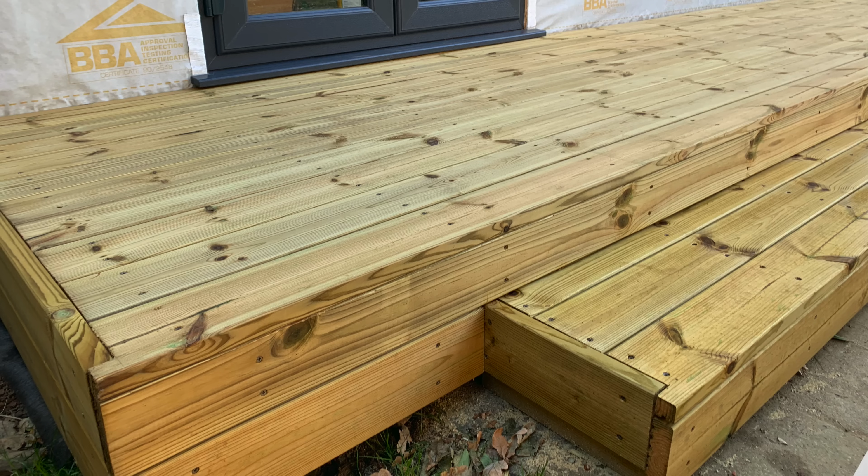Decking is an interesting project unto itself, but in relation to a garden room, having a deck may or may not be necessary depending on your site and how you've built the floor and foundations. The two reasons for having a deck are to hide the gap under a timber floor, though this can be achieved by continuing the cladding down to ground level or thereabouts. The other reason, and the main one for me, is that my door threshold is too much of a step up from ground level, so the deck provides a platform so that the inside and outside are a similar height, and the step up is set further back.

You could just build a step in front of the doors, but with my garden room being on the tall side, I reckon a deck across the whole front helps it look a bit more proportional.

First, we need to rewind back to part 2 and take a look at what rules apply to decking under permitted development, as I didn't specify a deck in my planning application. It's pretty simple. The top just needs to be no more than 300mm from ground level, and I'm assuming the same rule applies as we discussed in this video, that you can take that measurement from the highest ground around the deck so that it can exceed 300mm elsewhere if necessary.

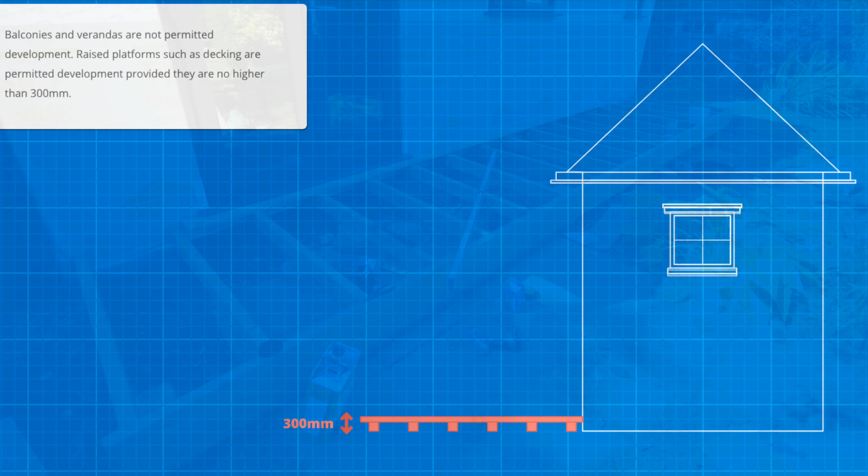So the timber joist that will be holding up the decking will attach to the garden room on one side, but need to be supported on the other. For this I could have used blocks in the same way I did for the floor of my garden room, but instead I opted for fence posts in order to minimise the surface area that could collect standing water, because the deck is exposed to the elements, whereas under the building the blocks will remain dry.

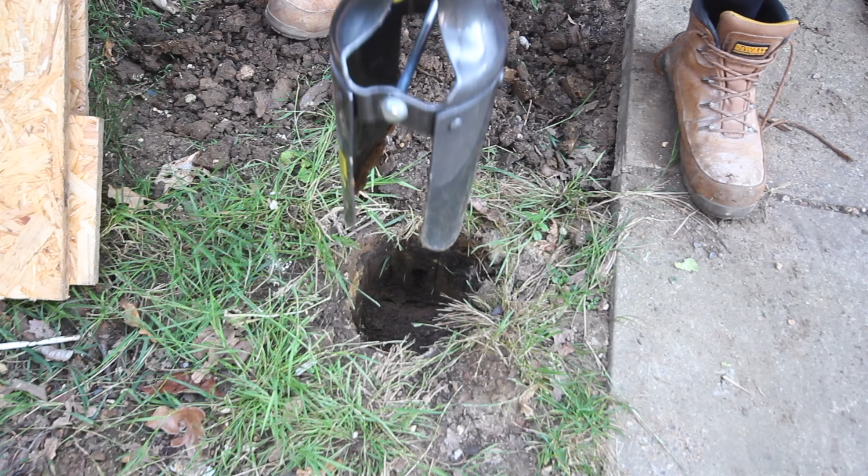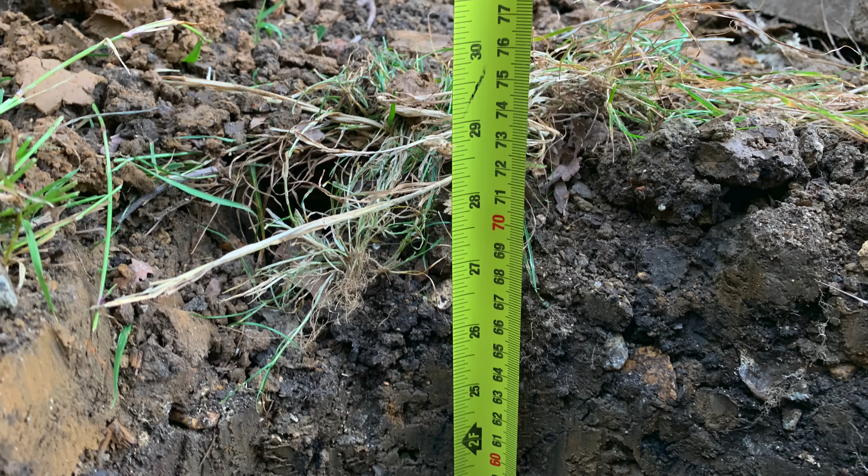I used a post hole digger to dig a vertical hole around 3 times the width of the 4x4 treated posts, so about a foot wide. The posts won't extend that far from the ground, so I don't need to go down too far, but the clay, whilst heavy, is easy to dig, so I managed to get down to around 70cm.

However, because it's clay, I wanted a decent amount of drainage under the post, which I'd saved the last bit of hardcore for, but stones or gravel work just as well and also act to help level the post.

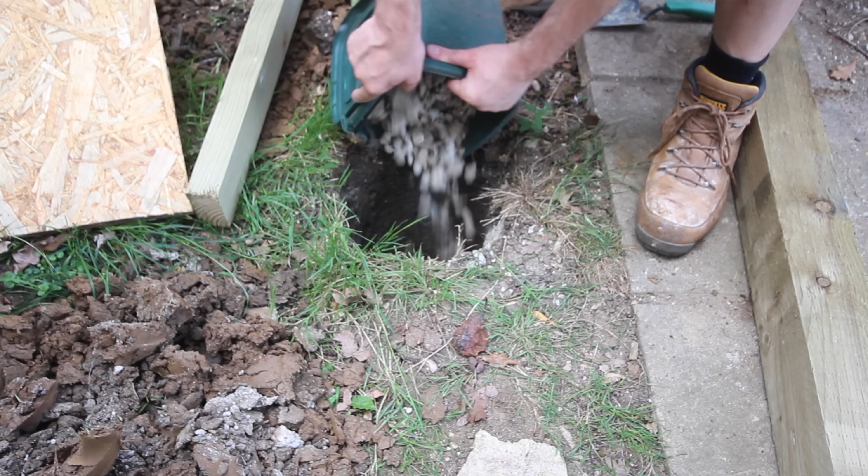Next, I attached the first joist to the garden room. More on this in a minute. I levelled the joist and then clamped it to the post. As the posts are so short, they don't need to be perfectly plumb, just close enough is fine.

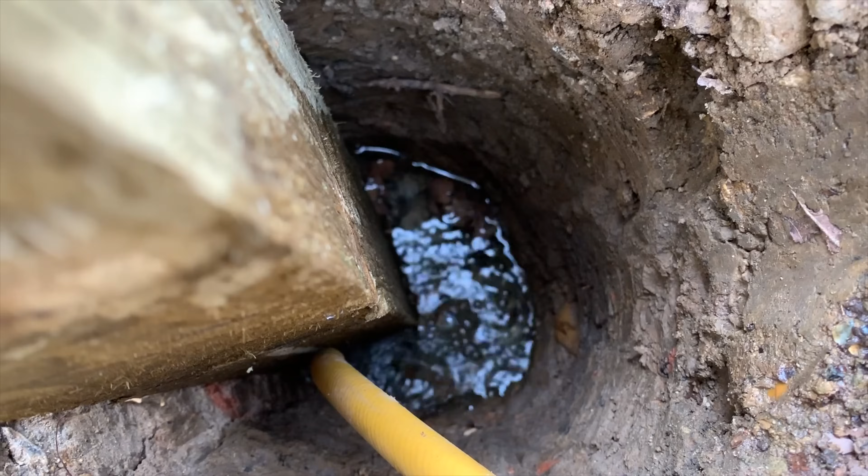I attached the two together with 100mm screws and then half filled the hole with water and poured postcrete in. Postcrete always feels a bit haphazard when you're doing it, but it always comes out nice and strong. I've covered this process in much more detail in this video if you want to check it out.

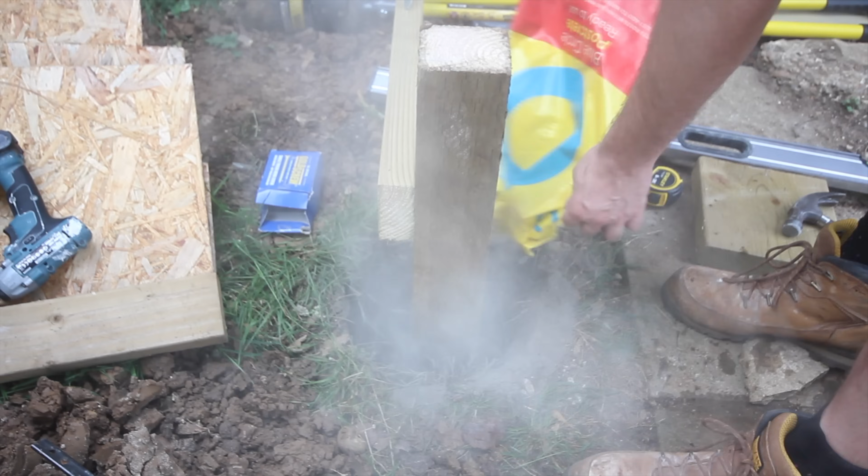One thing I do want to point out here is that if I were doing my foundations again with blocks, instead of just filling the hole around them with hardcore and compressing it, I'd use postcrete like this or possibly concrete. That would have been a lot stronger.

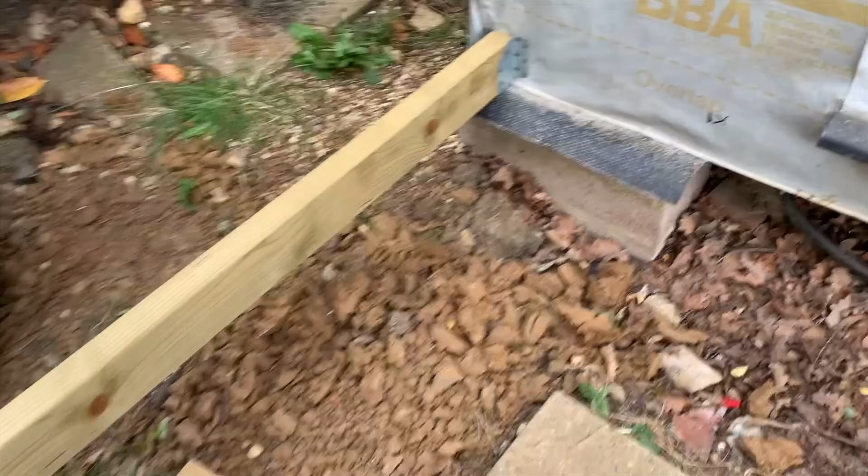So next I could go off the first joist and then mark up each subsequent joist location on the Tyvek membrane. How wide apart your joists are will depend on what decking you're using. Mine are 32mm timber, so I could probably have spaced them around 600mm apart, but I stuck to 400.

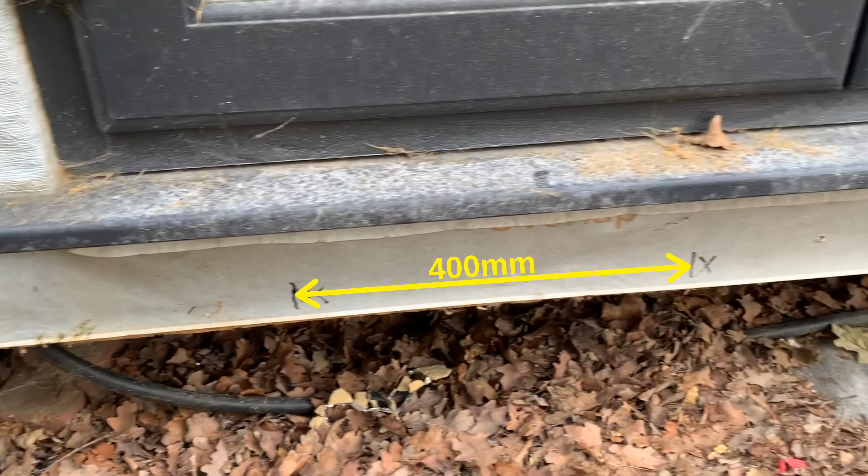Because we're not lining up our joists with sheet material, you don't have to be too exact, and you could choose a more random joist spacing like 500mm for example.

Once I had my spacing, I could add the second post in the same way as the first, and now I just need to connect the two posts to each other.

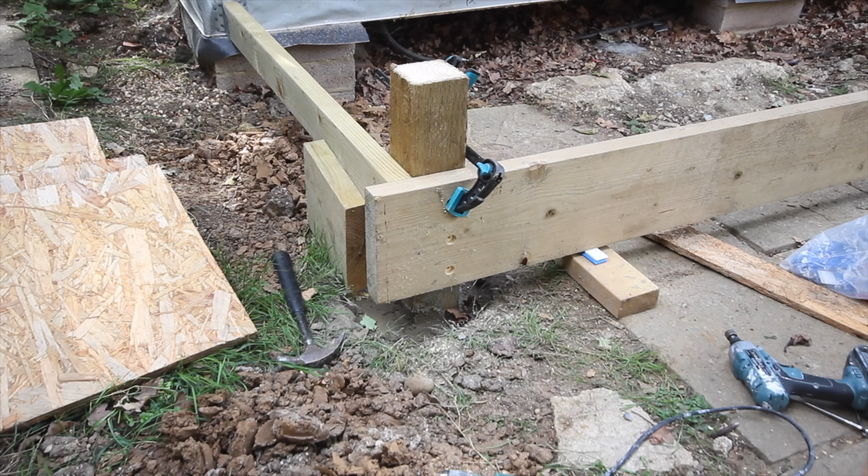For this I'm using a 2x9" timber, not so much for the strength as the span is only 2 or 3 meters, but because I had some left over from doing the roof, and also because I need it to come close to ground level so I have something to attach decking to so that I'm minimising any gap at the bottom. To attach the 2x9 I used 3 coach screws in each post.

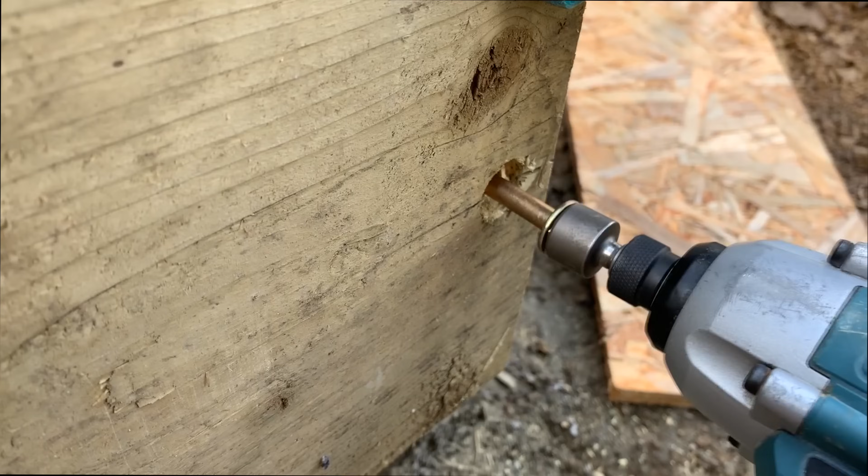These are pretty heavy duty and strong enough to support the 2x9 and all the joists. For the screws to end up flush with the board, I first used a spade bit to drill a wide circle to accommodate the head and built-in washer of the coach screws.

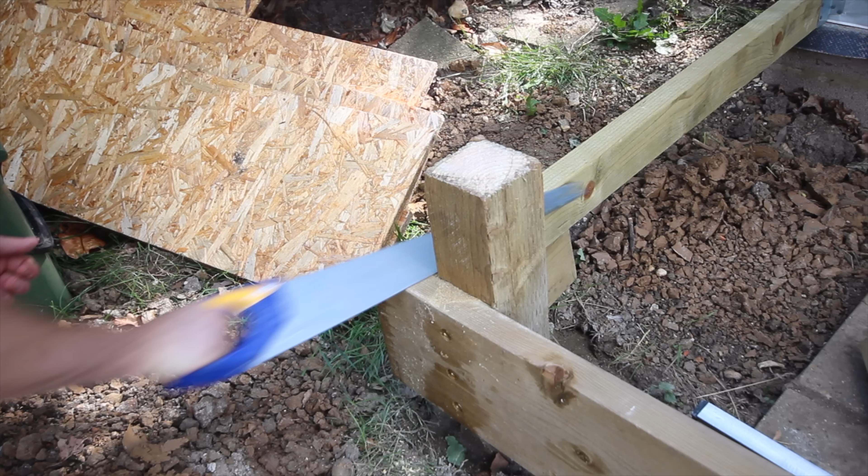After that, I could cut the tops off the posts so everything was level. I then repeated these steps for the third and the fourth posts. Once the postcrete was fully cured, I applied cement to the top in a pyramid shape to shed water away from the posts, which helps prevent rot.

The next step was to fill in the rest of the joists. I decided on a length of joist of 1.2 meters.

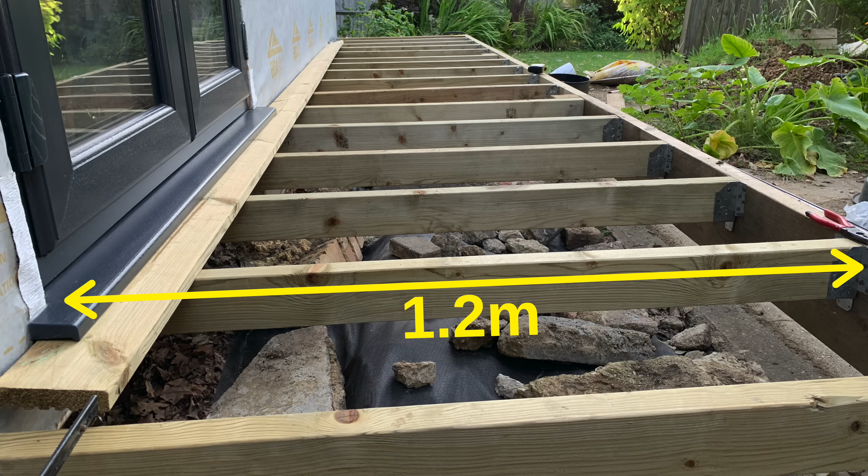I felt this was enough to be able to open the doors without having to step off the deck, and wide enough to put seating on the deck. 1.2 meters is also double the length of my roof overhang, which I thought might make for some nice symmetry, and it also meant I could just cut a 2.4 meter length in half with no wastage.

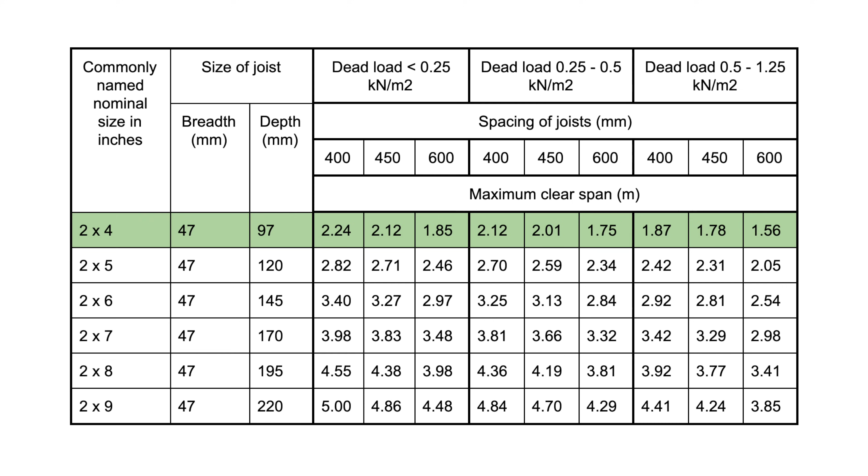Using the domestic floor plans as a proxy, 2x4 timbers are more than strong enough for a 1.2 meter span, so that's what I used, and no noggins were needed either.

I set the height of the joist so that with the decking boards, the top of the deck would come up just under the door sill.

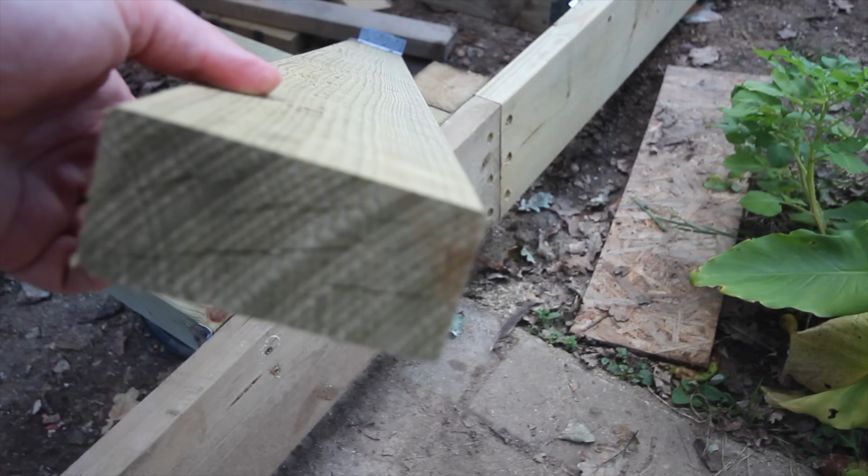So each joist, where cut, I treated with wood preserver and attached to the 2x9s with joist hangers. These are from the same place I got them for the floor, Builder's Metalwork. I find that in places like Selco, they tend to be 50mm wide and so don't fit as well as these. Mine did come with a bottom flap, which was in the way, so I just knocked these back with a hammer.

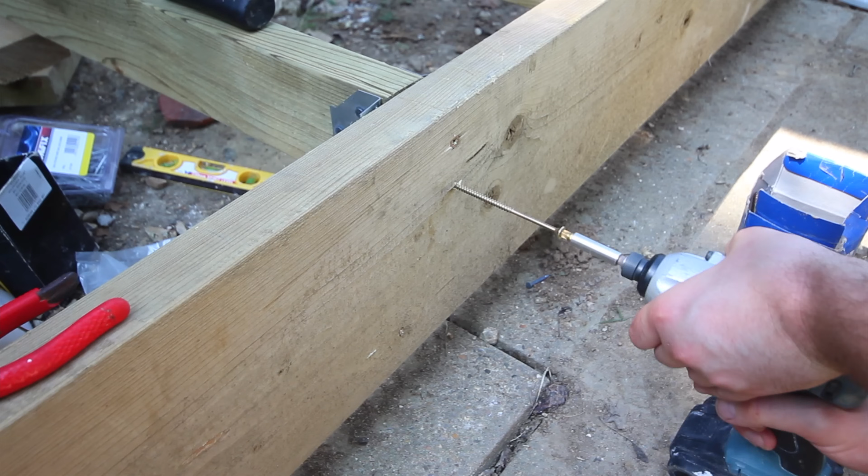I used square twist nails to attach them and then 2 100mm screws through the 2x9. On the garden room side I did the same, but as I can't screw through from the other side, I added in a few longer screws and nails along with the square twist nails to make sure they're secure, especially as I'm nailing through into the OSB rather than direct to the floor timbers.

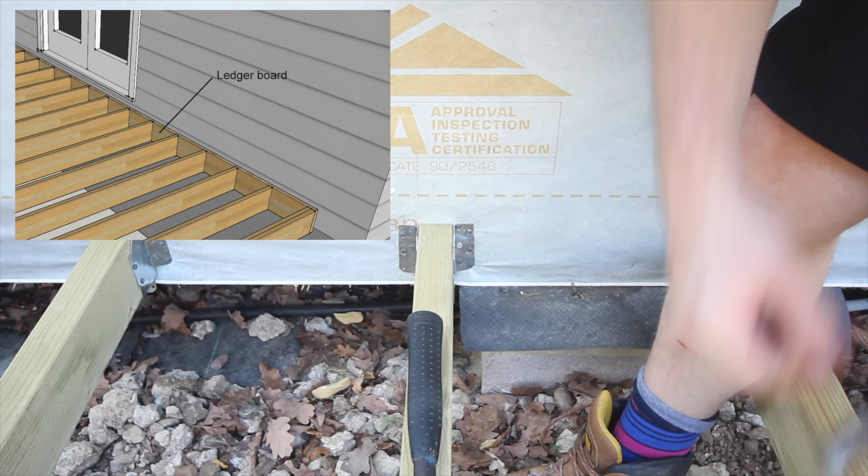Let's say your garden room is built with brick or block, or you're building a deck attached to your house. In that case, you'd first need to use masonry bolts to attach a ledger board, a 2x6 for example, and then you can attach your joist to the ledger board with joist hangers in the same way I'm doing here.

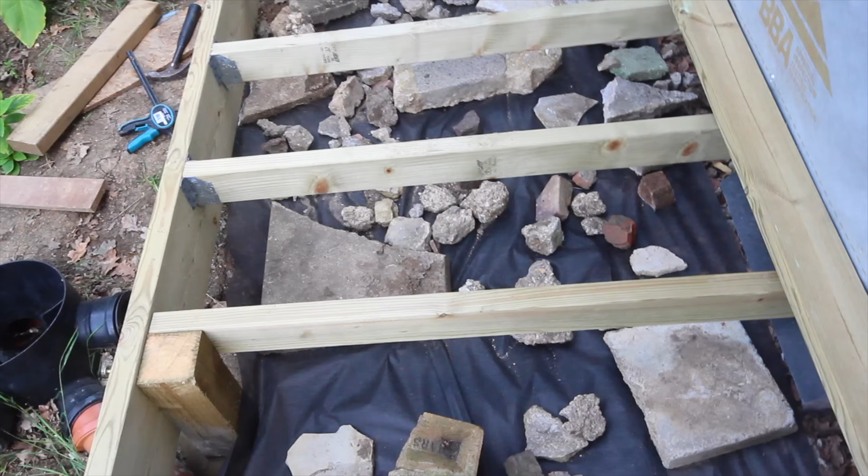Next, we rolled out the weed fabric. It's probably even more important to use it here than under my garden room, as the spacing between the decking boards will allow some light through and therefore weed growth. I still had a bunch of rubble left that I couldn't fit into the skips, so this felt like a very good place to hide it and to hold the weed fabric in place.

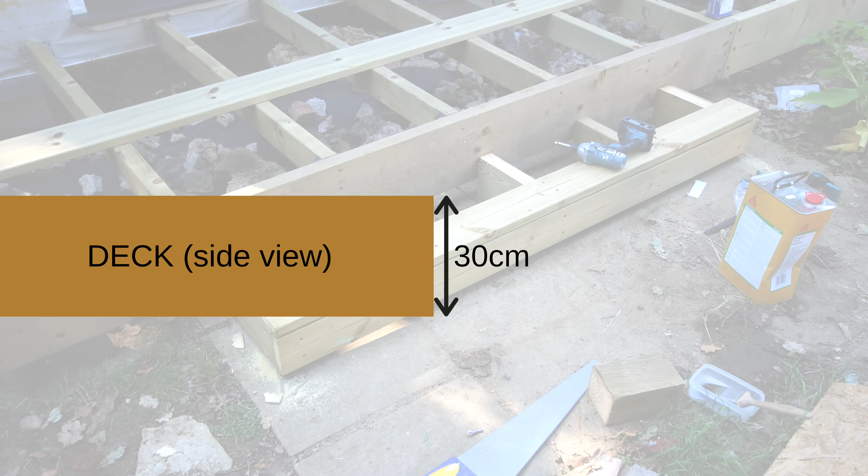Because the deck is reasonably high, I needed a step between the deck and the ground. The deck in front of the doors, once the decking boards are on, will be around 30 centimeters high. Half of that is 15 centimeters or 6 inches, which is the riser length. There's an easy rule of thumb to work out how long the tread should be for exterior steps: 2 times the height of the risers plus the tread should equal roughly 26 inches to feel comfortable walking up. So that means my tread needs to be 14 inches long.

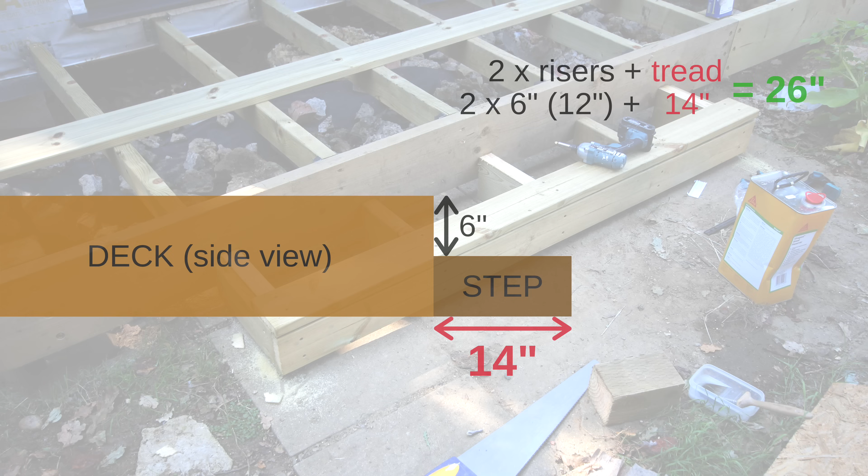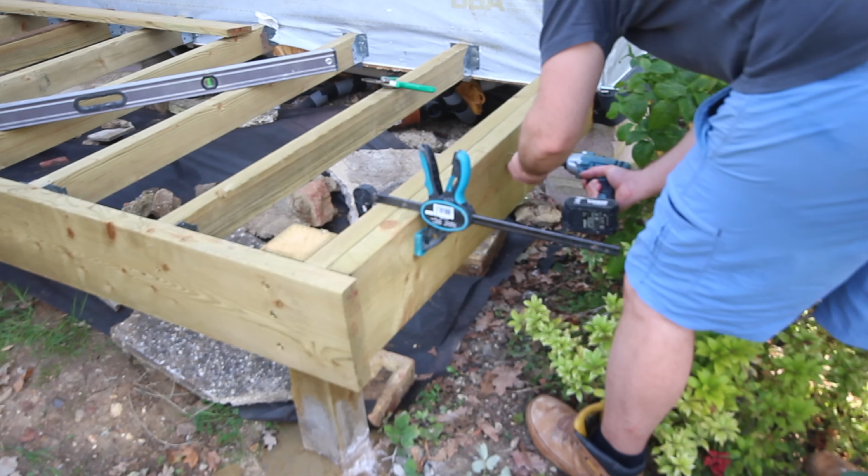There was no need for a stringer board for just one step, so I simply attached treated timber resting on the floor to the 2x9 with 2 screws, and then everything was held together with the decking boards. I think it might have looked cool if I'd done an inverted step instead, but that was a bit more complicated to create. Last job before the decking boards was to add some timber to the structure where the land falls away so that I have something to attach the decking to hide the gap.

So, decking boards. There are 3 main categories to choose from. Treated softwood, much like what the rest of the deck is made from. These require a bit more maintenance. They're not going to last for decades, but they are a lot cheaper than the other 2 options.

Second is a hardwood. There are lots of different species you can choose from. Balau is a really nice wood, for example. These are more visually appealing than softwood, they last longer and they require less maintenance, but they are more expensive.

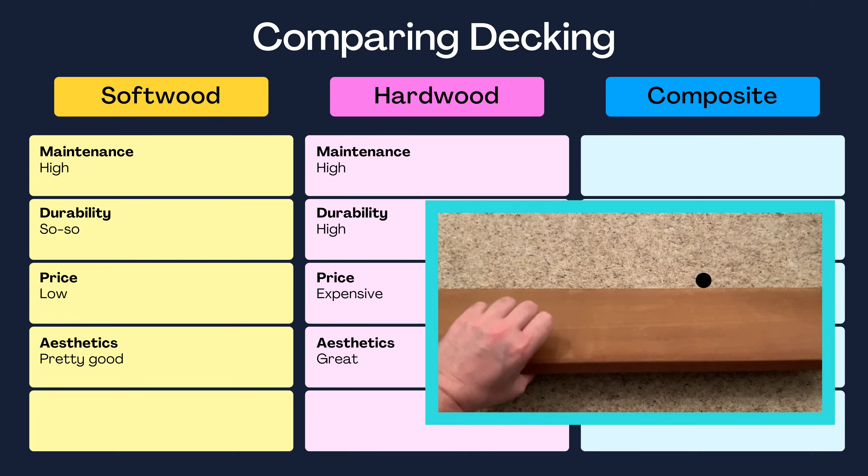The problem with all wood decking is that over time it will lose its colour and silver due to the sunlight, and there's no UV resistant oil that I know of that will give a long lasting protection on horizontal surfaces like decking, where water will sit on the surface and degrade the oil.

The third option is composite, which is a composite of wood and plastic. It doesn't degrade or lose its colour, there's no maintenance other than a good clean now and again, and you can get it in pretty much any colour, and there are also ones that mimic the grain and colours of wood.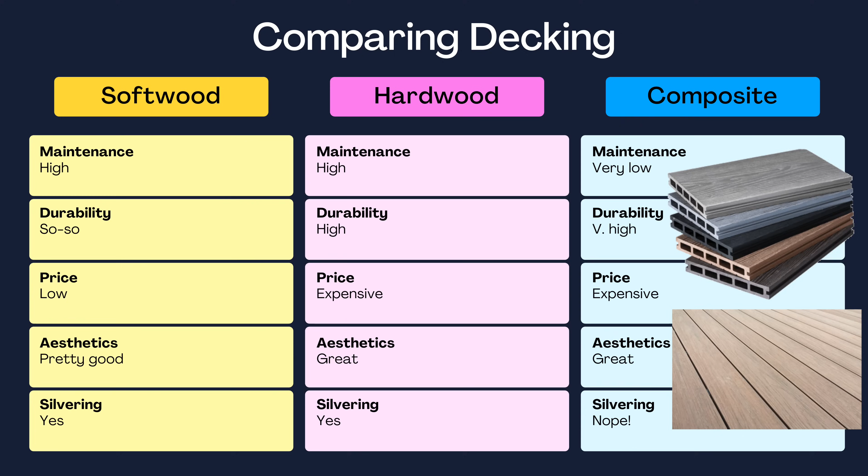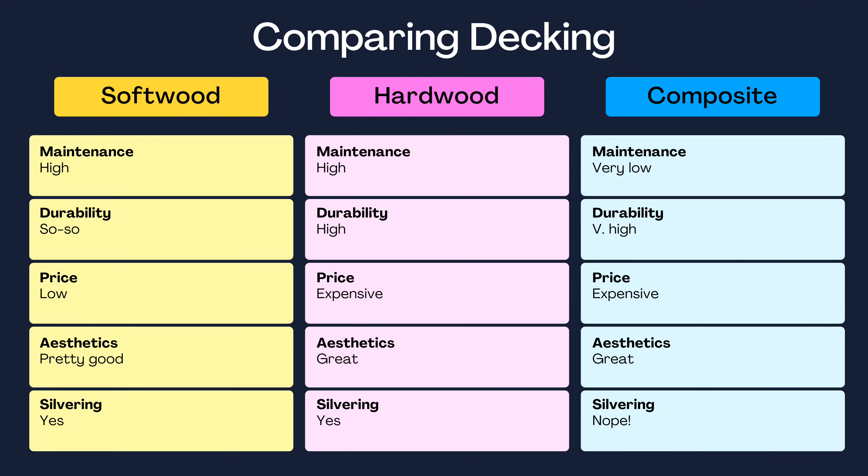So when I was choosing, it seemed to me that hardwood, as lovely as it looks when first laid down, is neither cost effective nor is it maintenance free. Composite would definitely be my first choice, but I was looking to save money at this stage, so I went for softwood with the idea that in 10 years or so, if it's worn out, I can easily replace it with composite.

Now the next bit I found quite curious because prior to this project, when I thought of decking, what came to mind is this grooved, undulating profile, but I wanted a smooth deck, and when buying the boards it does state that they're reversible, so you can have the smooth side facing upwards. But I figured there must be a good reason why the groove style is so prevalent, but when I looked into it I couldn't find anything to support it.

In fact, the opposite - the channels, unless there's a decent slope on the deck, will just fill up with water, dirt and moss. Nor do the grooves help with grip; they lessen the surface area contact between your shoe and the deck, and it's also less comfortable when barefoot. Finally, if you have the groove side downwards, this allows air between the decking and the joists so moisture doesn't accumulate and cause rot.

I don't know how this trend took off, it only seems to be done this way in the UK. It's not wrong - if you like the look, great, or perhaps I'm missing something here, but I really like the look of a smooth deck.

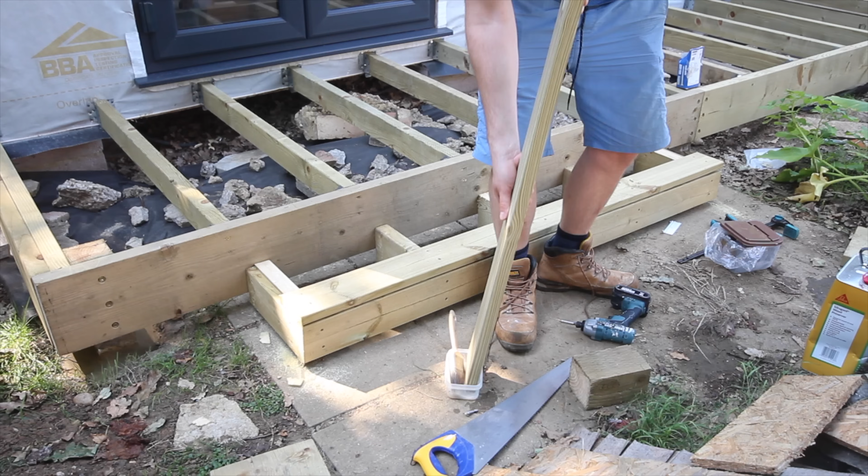Okay, so attaching the boards. Wherever I cut one, I dipped it in wood preserver and laid the board out. There needs to be a gap between each plank to let water drain away, and I decided on a 3mm gap, using my leftover window packers placed on the joist to get that even spacing.

To attach, I'm using decking screws naturally, and initially I thought I'd try countersinking to look a bit neater, but I abandoned that pretty quickly - the screws are self-countersinking after all. Maybe if you're using a more expensive decking, it could be worthwhile. Similarly, you could use a string line to get all your screws in a perfectly straight line. I just did it by eye instead, not wanting to let perfectionism get in the way of good enough.

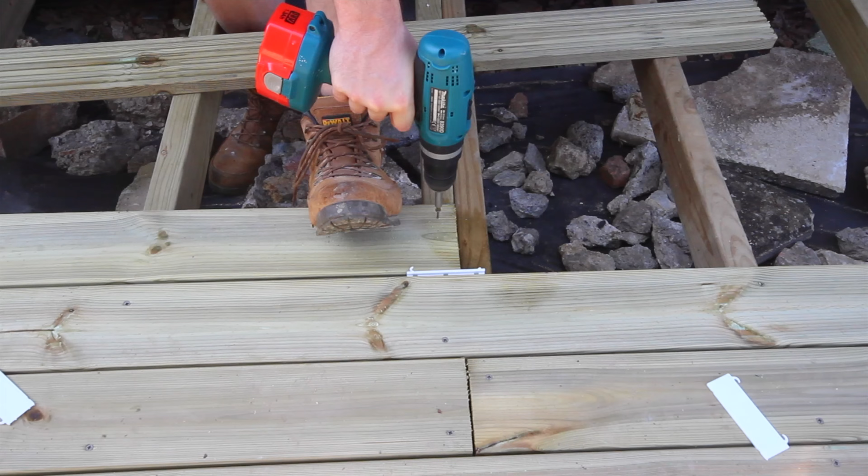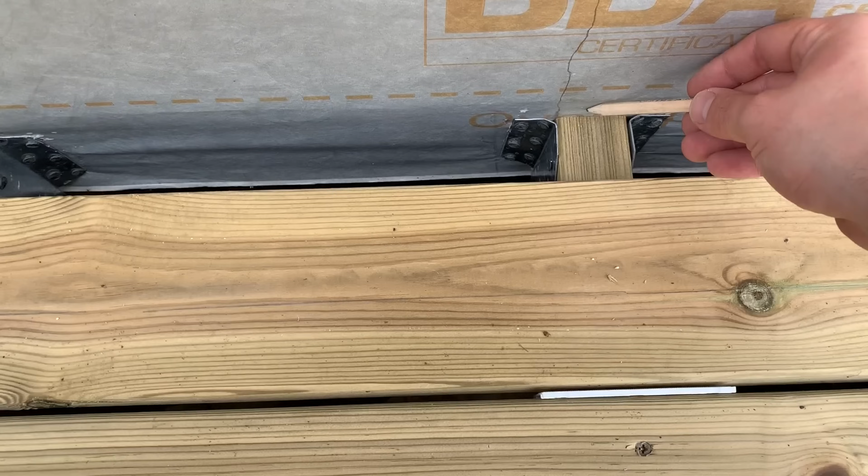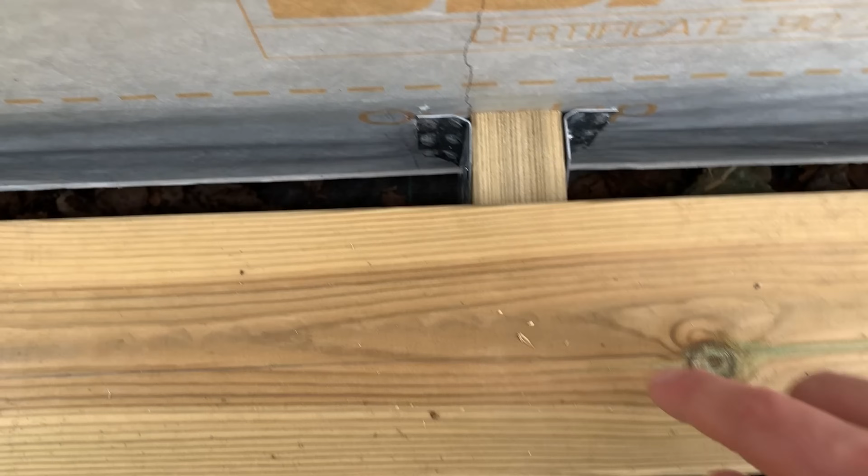I've got to fill in this section here, and I have put in the piece that's going to go there, and then I'm scribing in order to create the piece and to know how far to cut. It varies throughout the length of the bit, and that's not because of the wall not being straight, it's because the timber's not straight and it's bowed over however many courses.

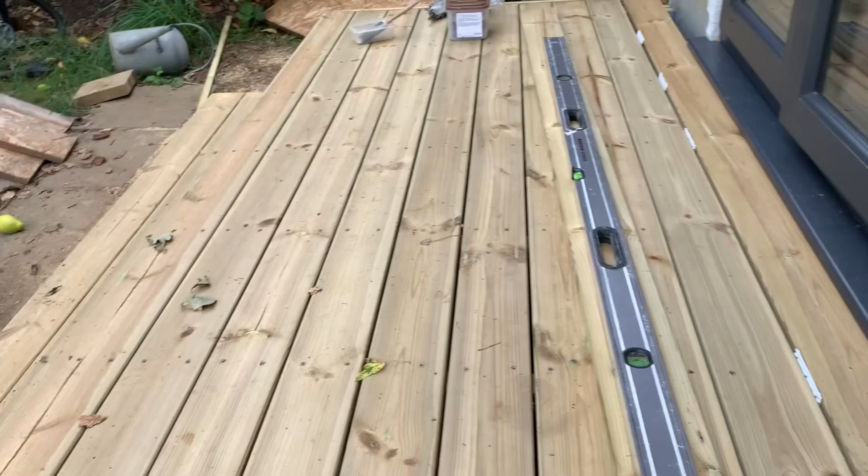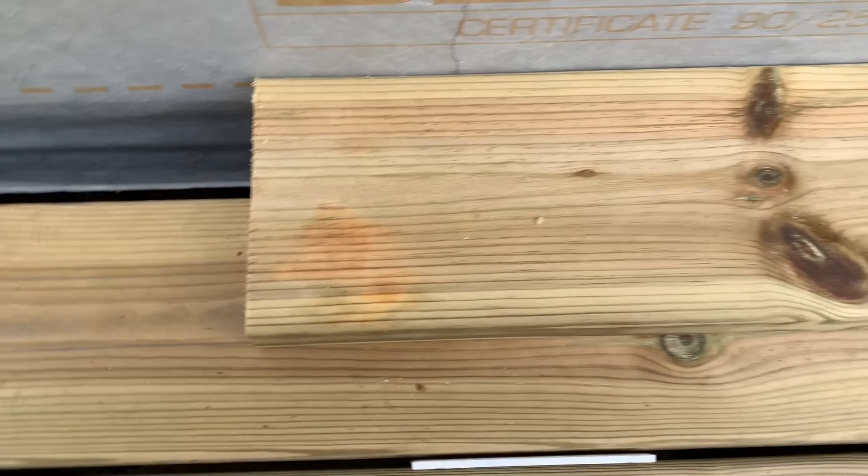So in order to work out how to cut it, instead of measuring each one, we can scribe by using a scrap piece - making sure that this plank here is tight with the spacers, and then this goes here, and you push it far against the wall, and then you can draw a pencil line along. I've done this so you can see my pencil line.

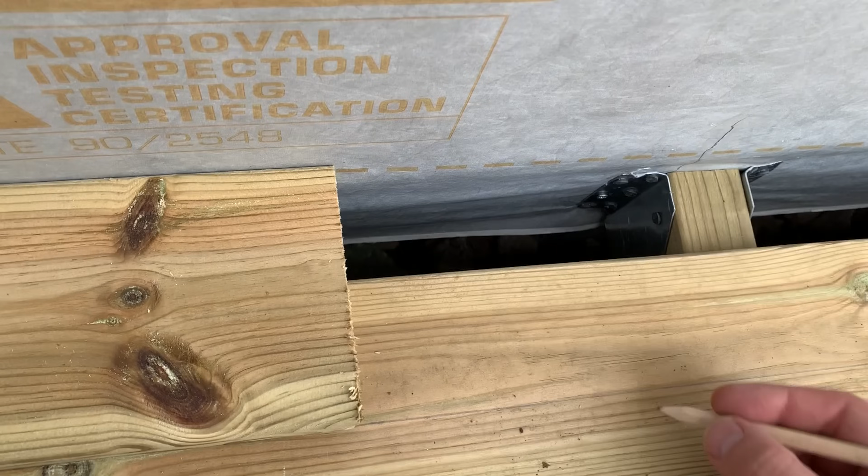Now that doesn't take into account the fact that I'm going to need spacers between what will be the board that goes here and then here, so I'm going to have to come a few mils in from the line. But of course it doesn't matter if I have a bit of a gap here either, because that will be covered by cladding.

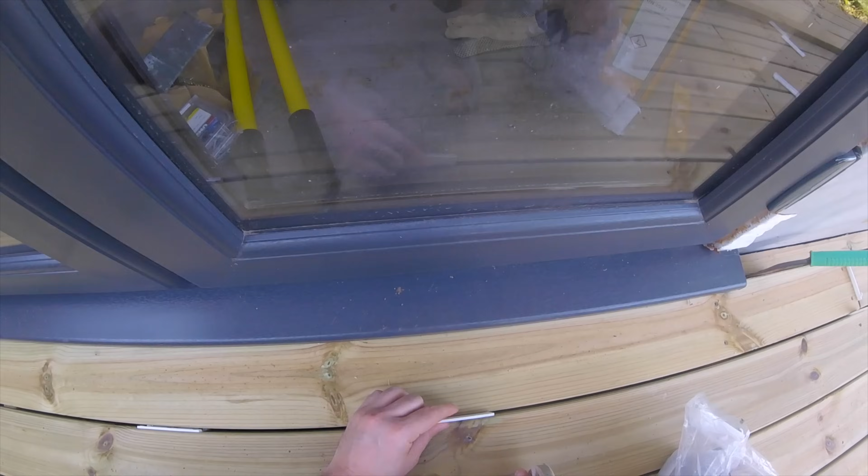One last thing to point out is that I covered the end grain of the top of the deck with the decking boards on the side, and then I covered the end grain of the sides with the decking on the front. So you can only see the end grain of those front boards when viewing the deck from the side. Neater still would have been to cut a 45-degree mitre so all the end grain is hidden, so you may want to consider doing that.

Final job was to protect the deck. There are a myriad of products on the market, including oils, stains and paints. I hadn't 100% decided on what cladding I'd be using on the front of the garden room, and therefore I didn't know what colour to try to match or contrast against, so I kicked the can down the road by going for a clear decking oil. It's a lot easier to go darker later on than it is to go lighter.

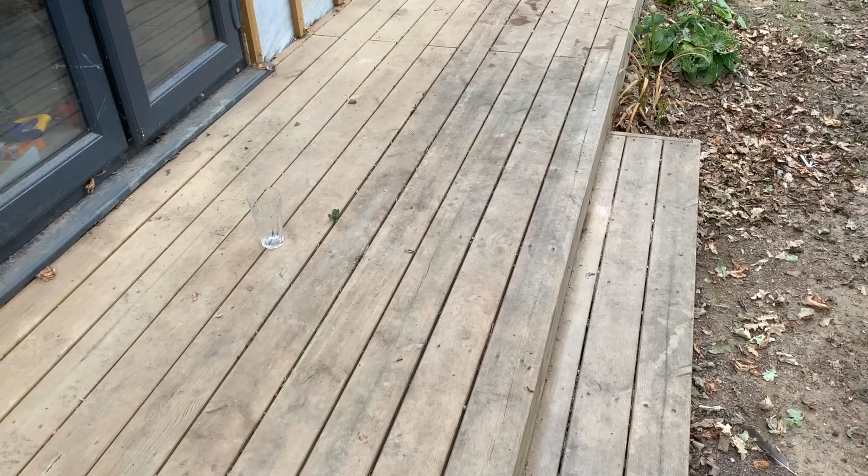I applied 2 coats with a brush, and this needs to be done every year or so to nourish the wood and replace the natural oils that are lost over time. It looked really good, and I'd even started a bit of landscaping, but the builders who did the extension next door over winter used the deck to store their materials, and after a year it's lost its luster and the silvering I talked about earlier has started to take hold.

To clean it, you can use one or a combination of a pressure washer, sanding, or a wood reviver or a restorer gel, and then reapply the oil.

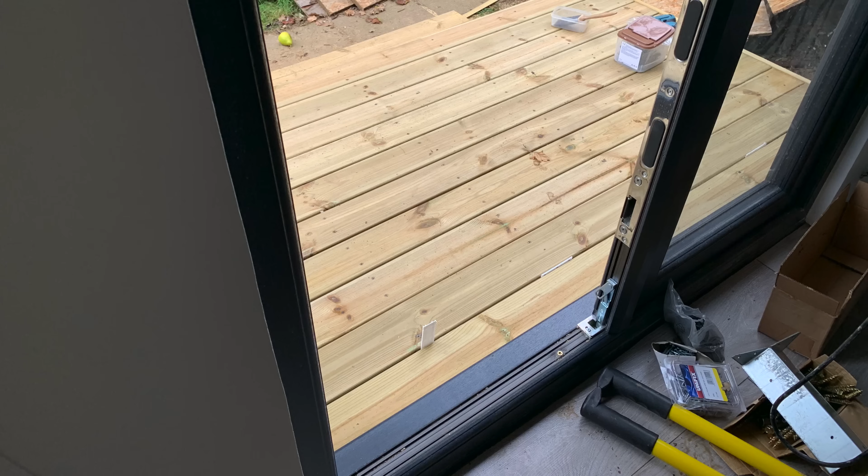Another reason I've been reluctant to use a stain or decking paint are the horror stories of it peeling and flaking. This paint, for example, is guaranteed for 5 years on horizontal timber surfaces, but what's not clear is what happens after that - can it just be painted over, or does it need to be stripped back first? So if anyone has used a product that stood the test of time, I'd be very keen to know.

It's all a bit of a faff in my opinion, so as I said earlier, if you can afford composite, that seems to me to be by far the best choice. When we get to timber cladding, we don't have these issues because 1, you're not walking on it, and 2, it's vertical, so there's no standing water degrading the finish.

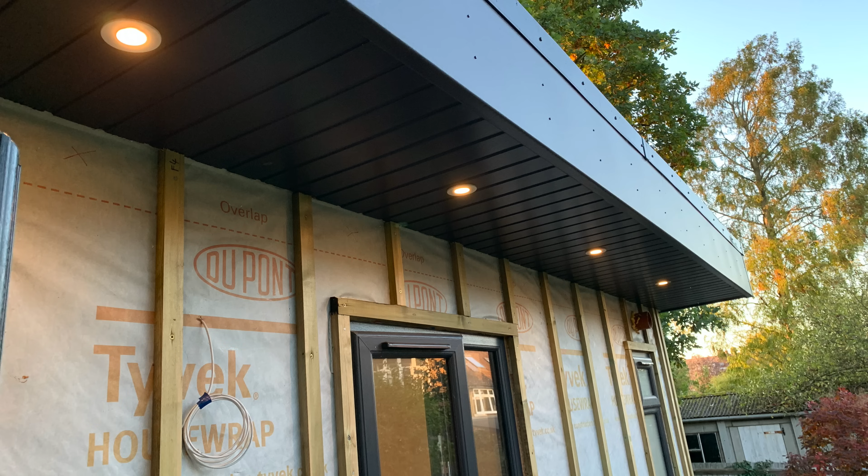So the next video is on soffits and battens. Now on the face of it, I realise that may not seem like the most exciting of topics, but there's a lot of loose ends to tie up, and it's the start of discussing cladding, so not one to be missed. I'll see you then.